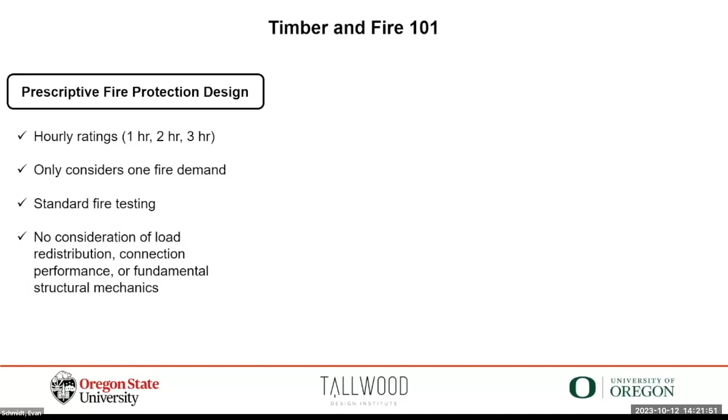That is what you all are specifying within the International Building Code. Those critical behaviors are flame through, smoke through, or structural failure, although structural failure very often does not control. So if you notice, there's no structural engineering or design associated with the hourly ratings.

On the flip side, performance-based design for fire uses everything we know about structural engineering and fire dynamics to develop a building-specific fire demand. If I wanted to calculate what the fire demand in this space is, I could, and I could perform a performance-based design and look at how the fire would spread within this space, what would happen to the windows, how egress could be enabled for everyone to get out.

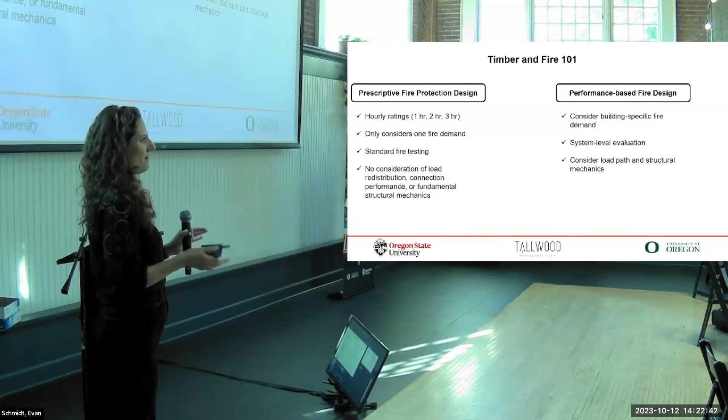We could also look at system level evaluation, considering if one of these girders failed, could load be redistributed throughout the roofing system, or would that spark progressive collapse of the building. This is really where the research lies.

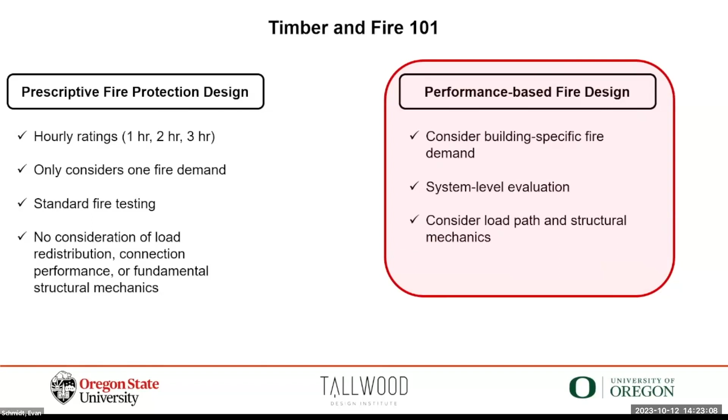All of the research we're doing at Oregon State University as it pertains to fire research falls under this performance-based design. How can we more fundamentally understand the behavior of mass timber in fire? How do we understand its pyrolysis and charring better, and fire dynamics within the mass timber environment and a mass timber building?

So now that you all understand fire and you're all fire experts, I'm going to tell you the story of fire research within TDI. It's been really focused on 4 segments, the first being timber concrete composite floors.

We heard from Ian about all the amazing research happening on timber concrete composite floors, on all the different types of loading scenarios, as well as serviceability requirements. We tested a number of timber concrete composite floors in fire multiple times over the last 5 years, as well as performed finite element analysis and developed design solutions for them.

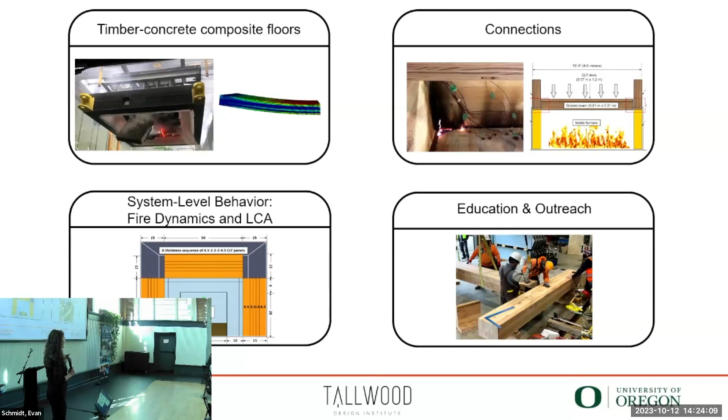We've tested a number of connections, both platform frame and balloon frame connections, as well as glulam beam to column connections, and I'll talk about those a little bit later in the presentation, both under a heating exposure for the fire, as well as in a cooling scenario after the fire, so during all phases of the fire demand.

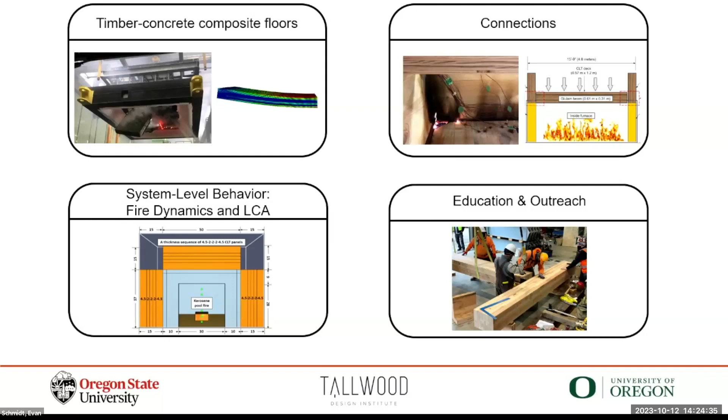We have used Fire Dynamics Simulator to simulate fire within mass timber buildings, to simulate fires within mass timber compartments that have been tested all over the world. We've been able to simulate velocity measurements as well as heat fluxes and temperatures throughout these compartments and buildings, and then took all of that knowledge and applied it to mass timber buildings under construction to look at sequencing of applying fire protection and how we can incorporate that into the design process.

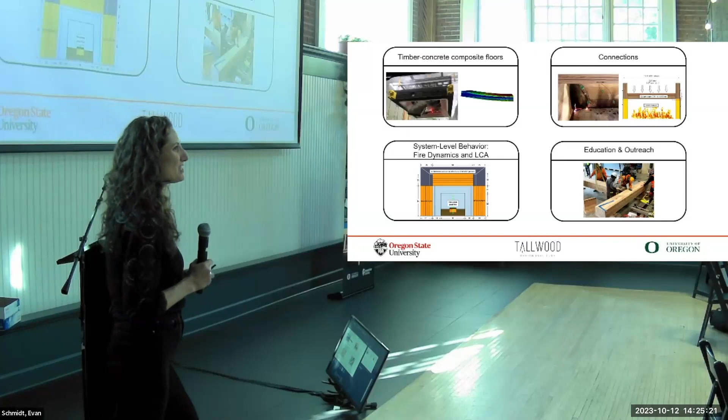So this is really where we've been going in our research. I have education and outreach, and I'll talk about it at the end. I know a lot of my colleagues have highlighted the students working on this project, but all of this research is funding students. It's funding the next generation of mass timber experts who are going out and working for all of you, bringing that knowledge and excitement for mass timber into industry. We can't forget about them, because all of these research projects are developing new knowledge, but also new students and new experts in this field.

So there are questions left to answer, a lot of questions. We've been looking mainly at the heating phase of fires. We haven't been considering smoldering of mass timber. How do we design a mass timber building for firefighter safety? How do we design for smoldering so that we can prevent further damage of mass timber during that decay phase of the fire?

What about LCA, which we talked about a lot? In fire, the emissions from a building contribute to the carbon and environmental impacts. Water runoff from firefighter suppression systems also contributes to the environmental impacts of fires. What are those emissions in a mass timber building? How do they differ from a building that's steel or concrete? How do they differ when you have protection versus no protection within the building? Protection meaning encapsulation, not sprinklers.

And then, can we actually scale these experiments? Large-scale experimental testing is really expensive. I literally fly to another country to go do them. So can we actually learn from scaled experiments in fire? What can we learn, and how is that beneficial to moving this industry forward? And how can we do that maybe on OSU's campus with our new fire lab?

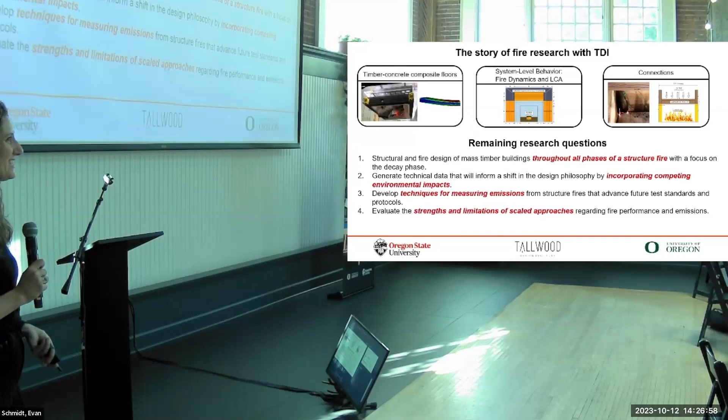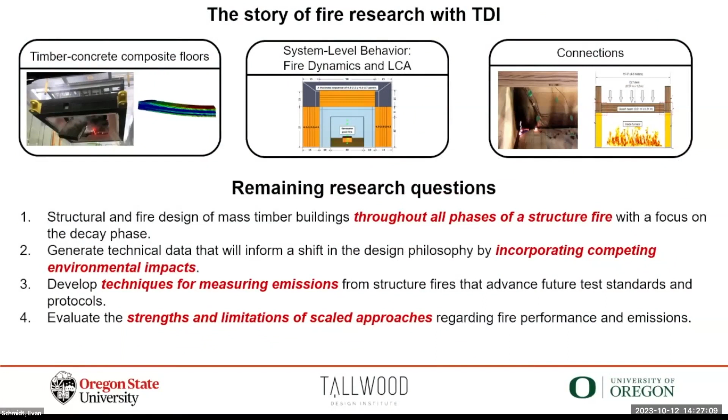So these are some of the remaining research questions. I'm sure you all have many, many more, but this is really where I'm going to focus the remainder of my presentation, to show how some of this previous research is fueling future research that we're doing to answer these questions.

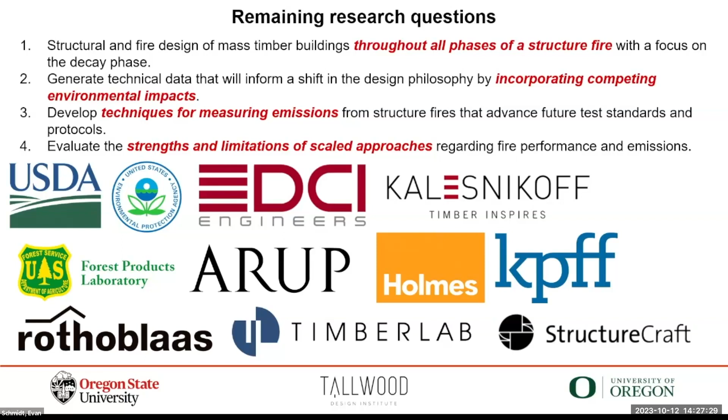So all this future research is in collaboration with a lot of you. I want to highlight all of these amazing companies that have been consulting on our projects, as well as providing support for the projects, and hopefully hiring our awesome students.

Okay, so now that you understand the prescriptive fire protection approach, the performance-based fire protection approach, and what we've done so far in fire, I'm going to talk a little bit about the decay phase of the fire and why this is so critical. You heard this morning from Ian and Judith about how we're really supporting our local economy through all of this timber research. We're taking timber from Oregon forests, funneling them through Oregon companies, creating these mass timber products, and putting them in our Oregon institutions.

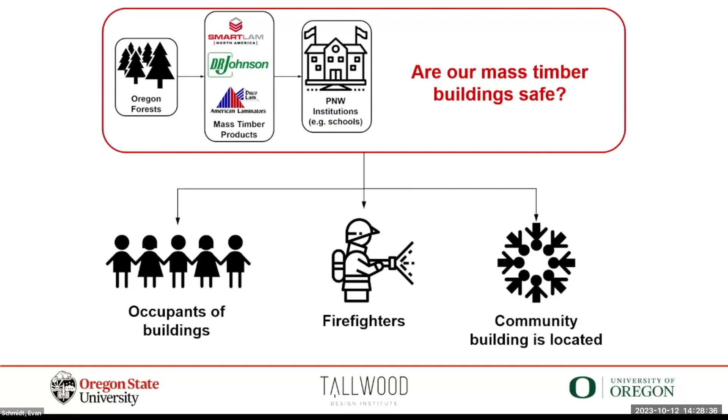But are our timber buildings safe? A lot of our research is really focused around that. We're focused on whether our timber buildings are safe in seismic and fire. Are they durable? But from the fire side, I'm asking this question from the occupant safety as well as community safety with emissions from the fire, as well as smoldering for firefighter safety.

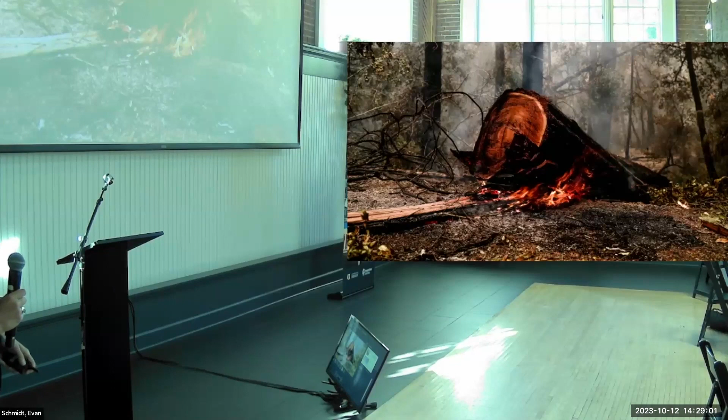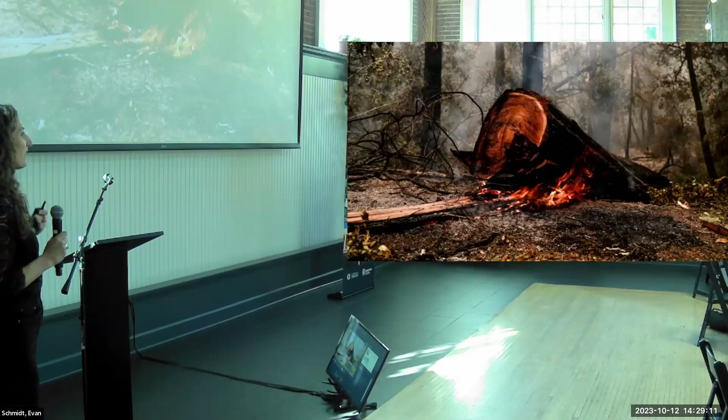So we know smoldering occurs, right? We are in the Pacific Northwest. I can probably guarantee 99% of us have been camping, and we know that timber smolders, we know that the campfire smolders. Mass timber is no different, and it's not a bad thing. It happens, and we can't ignore it. We need to make sure that we address it. We need to know where the smoldering occurs so that we can actually design for it, and so firefighters can identify it in buildings when they go in, and we can create a safe environment for everyone.

There's two experimental regimes that have been going on that I'll dive into in a second, that have really been inspiring this future research that's going to be happening over the coming years.

The first topic is smoldering behavior of platform frame and balloon frame construction, as well as fire behavior of glulam beam to column connections. In recent years, in all my fire experiments, we've been including a decay phase of the fire, to just leave specimens on the furnace and continue to collect data so we can see what happens.

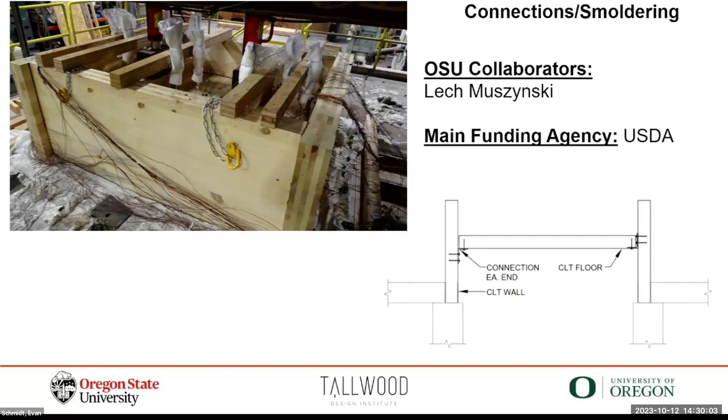The first project I'll talk about is in collaboration with Lech Muszynski, funded through a USDA Wood Innovations grant. This project tested balloon frame and platform frame connections, shown on the left, in a smaller scale setup on a furnace at the Western Fire Labs.

The specimens were loaded and exposed to 1 hour of the ASTM E119, which is the standard fire. We then shut the furnace off and just left it for an hour.

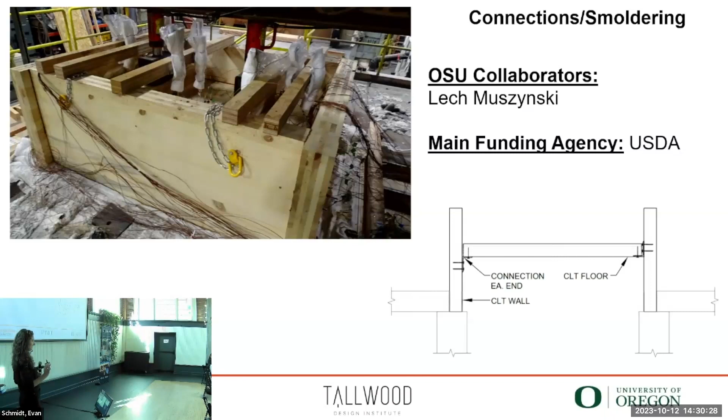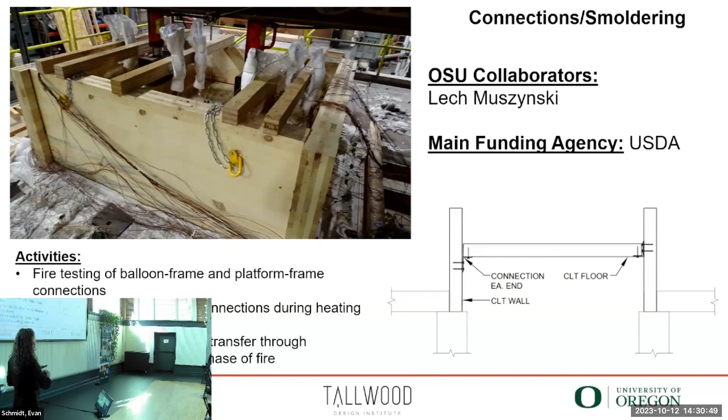Our goals were to look at what the char rates were during the heating phase and what the char rates were during the cooling phase. Do we actually see char progression during that hour of quote unquote cooling? And then how do these connections actually perform during the fire itself?

What we saw is that heat does begin to propagate through these connections. Equilibrium has to occur, right? So if it's cooler on the top surface of the CLT, heat will continue to propagate through the CLT, through the connection, so that we have that equilibrium of our temperatures.

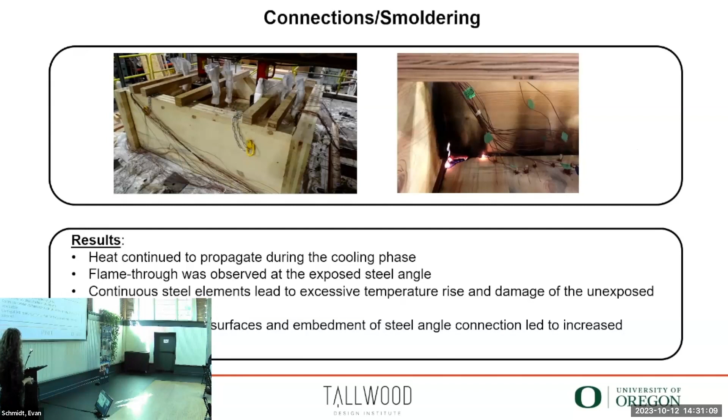We saw combustion, that picture in the top right is flames that occurred 9 minutes into the cooling. So the furnace had been shut off for 9 minutes. There was no external combustion and flames occurred.

We saw that there was very large temperature rise when we used steel elements within the connections. And then we also saw some really interesting behavior with the charring.

We saw char compression. In steel construction, we characterize our connection performance in terms of rotational capacity during a fire. But in mass timber, if we try to apply the same thing, we have rotation of the connections during the fire due to loading, due to just thermal degradation of the wood itself, due to the decrease of material properties. But then we also have compression of that char itself. So we have both happening at the same time. So how do we differentiate between the two?

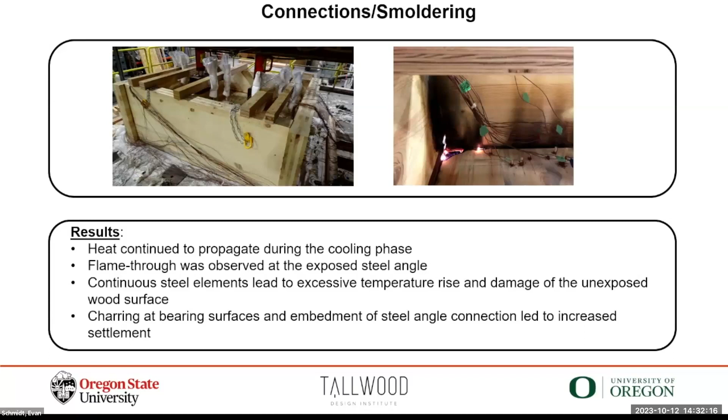What movement is from char compression? What movement is from just the structure itself?

We had the opportunity to perform another experiment on fire behavior of glulam beam to column connections. These connections were tested under deformation compatibility at OSU, and then we tested 3 connections under fire demands at the National Research Council in Ottawa, Canada. So I literally go to another country for these fire tests. This was in collaboration with Arijit Sinha and KPFF and Holmes.

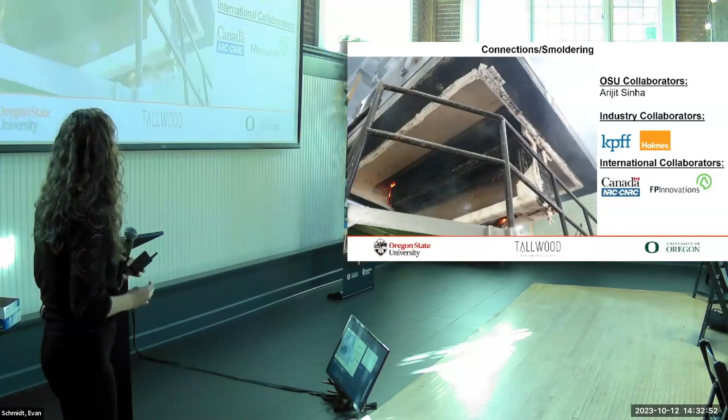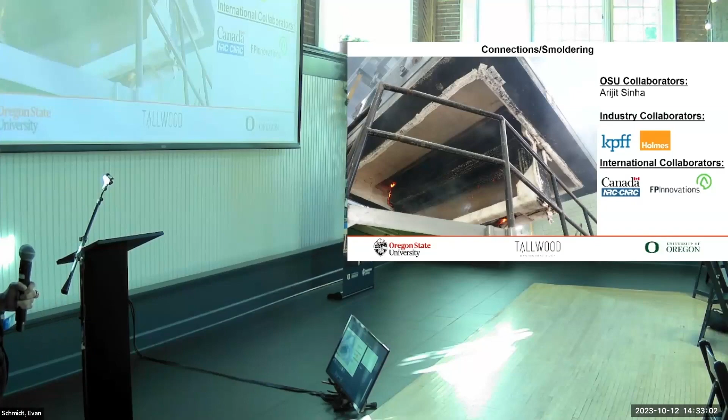We tested, again, 3 different types of connections. The picture I'm showing here is after we subjected each connection to 1 hour of heating, and then we just shut the furnace off and left it there for 2 hours. And that is what came out of the furnace.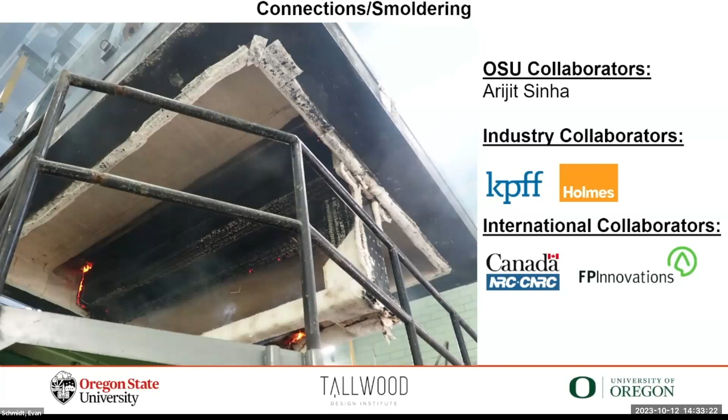After 2 hours, it was still flaming. And again, this isn't, I'm not saying this is a bad thing. Mass timber is great, but we need to understand this better so we can actually design for this. We can actually understand why this is happening and how to protect against it.

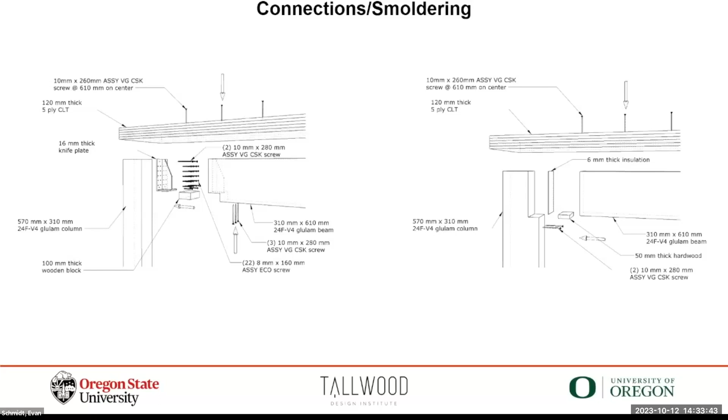The 3 connections that we tested: shown here on the left was a knife plate connection where the glulam beam was bearing on a steel knife plate that was then embedded within the glulam beam itself and screwed to the column. The one on the right is a pure bearing connection, so there was no mechanical fasteners between the beam and the column.

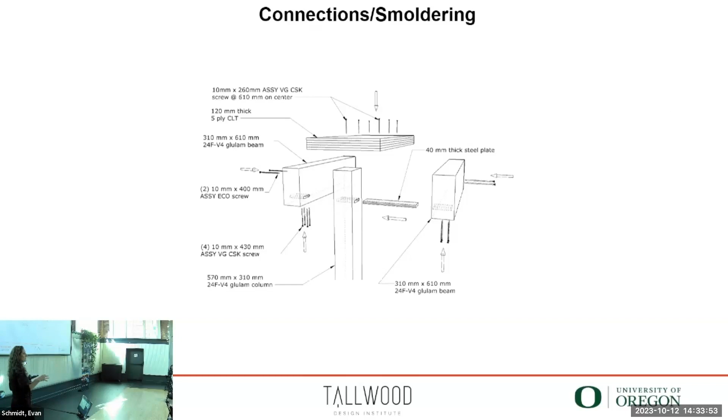The last one was a double beam connection where 2 beams sandwiched a single glulam column, and there was a steel plate connecting all 3 together.

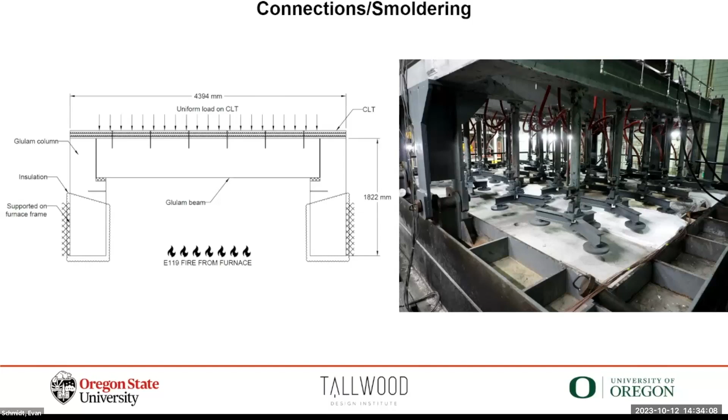We loaded the top of these specimens with a distributed load. This is why I go to another country—their loading apparatus is fantastic. And then we subjected the specimens to the standard fire.

We were able to look at the char depth through the connections as well as through the glulam and the CLT itself. We saw that there is definitely more charring through the connections, and we were able to calculate that the char rates in Eurocode for connections are actually unconservative. We saw corner rounding, almost textbook corner rounding, which is when the char creates those rounded edges, and what was predicted in Eurocode was almost spot on to what we saw in the experiments.

We saw that smoldering occurred for almost every single specimen. Every specimen was flaming when we took it out of the furnace, and the heat continued to propagate through the connections as well as through the glulam itself during the cooling phase.

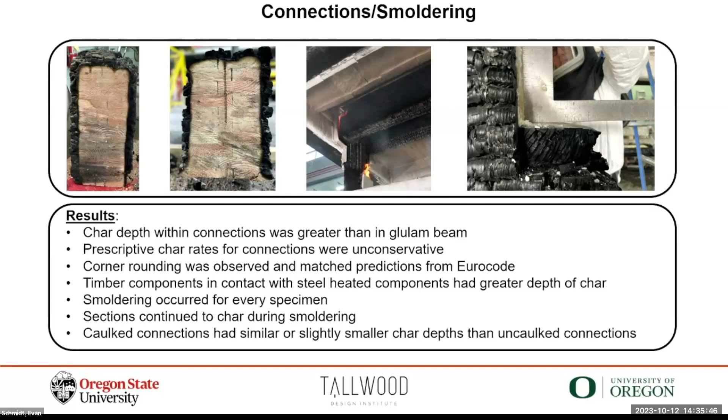We actually tested two connections per specimen, so we were able to test a caulked and an uncaulked connection. We didn't really see a lot of increased or improved behavior with caulking—we saw either similar or slightly smaller char depths with caulked connections. But on the picture on the right, you can see compression of the char. Nothing was at 90 degrees when we took it out of the furnace. We were able to see that compression of the char due to just the weight of the glulam on that block right there.

So we did these two projects. We tested isolated connections or connections within frames, but these aren't real fires. The ASTM E119 fire is not a real fire—it's actually a very intense fire. And a furnace is not a real environment either, so it doesn't have the right amount of oxygen that we would have within this room, or if there was a fire within this room.

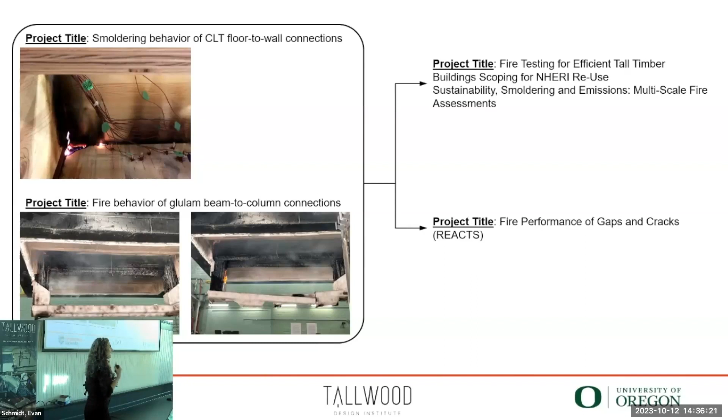So where we're going with this is that these tests were really informative to show what could happen, what is possible, what needs to be studied. And we can further study this in a project that is just kicking off in fire testing, doing large-scale compartment fire testing next summer at the Alcohol, Tobacco, and Firearms Lab in Maryland.

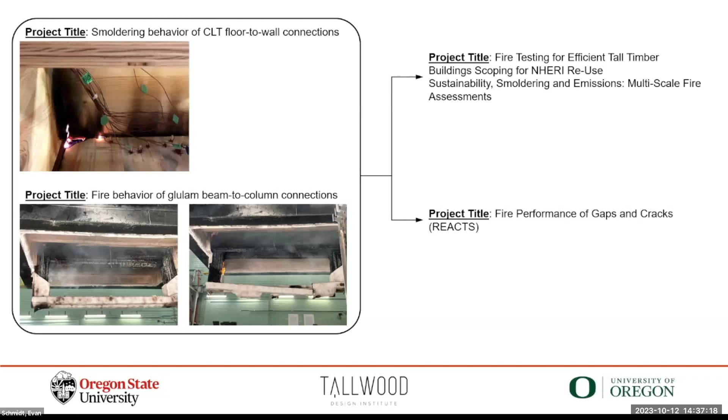So I'll just cover those briefly before you don't have to hear from me anymore.

This project, looking at large-scale compartment fire tests, our goal is really to look at a number of different things. We want to address smoldering, sustainability, and emissions. This is in collaboration with Forest Products Laboratory, ATF, and the EPA.

We are testing at three different scales. We're testing at large scale first next summer. We'll then be testing at the Forest Products Laboratory at medium scale compartments—someone asked us what a medium scale compartment was, and we decided the size of a doghouse, so that is a medium scale compartment. And then we will be doing some bench scale tests.

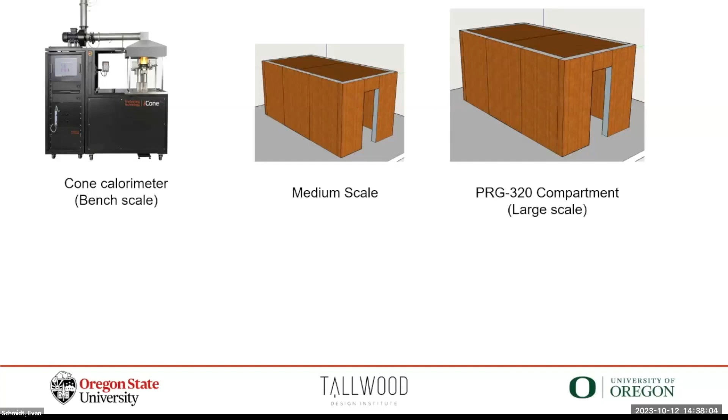We want to know what is scalable—what can we learn from scalable tests? Do we always have to do large scale tests, or can we actually perform some of these medium scale compartment fire tests that are much cheaper? Can we learn something from our bench scale tests and scale it up to an actual building environment, or do we always have to do these large scale tests?

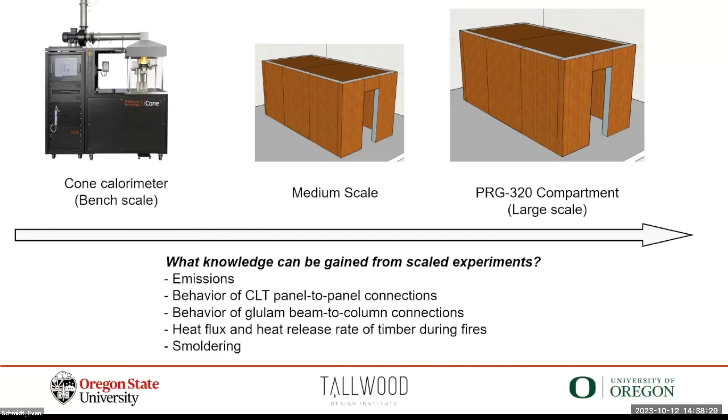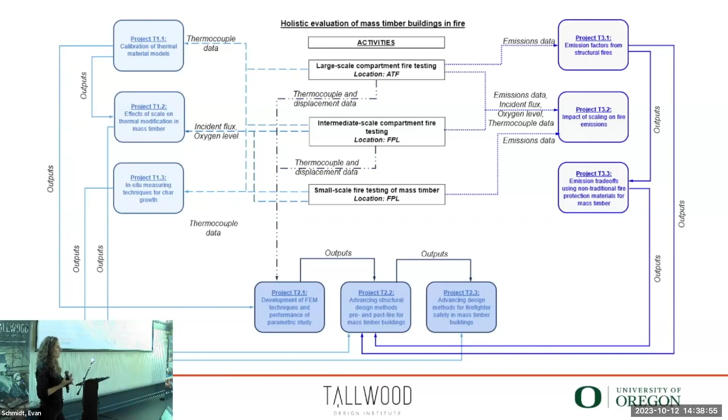Every part of the project is really connected to one another. All the information from one scale is going into another scale, and all the information between tasks is going into one another. We will be doing finite element analysis of all the different scales, including FDS modeling as well as modeling of the connections themselves. So this is really experimental, numerical, overarching scalability.

These tests will occur also at the Forest Products Laboratory. Between the previous proposal I told you about and this REACTS proposal, this has created a really great collaboration between OSU and the Forest Products Laboratory. Again, there's students on these projects. We need amazing students to go into these labs and learn from the technicians and researchers, go work there, and continue that collaboration. So here I'm just showing CLT, but we're looking at gaps in glulam connections as well as in CLT panel-to-panel connections, trying to answer these questions I posed earlier.

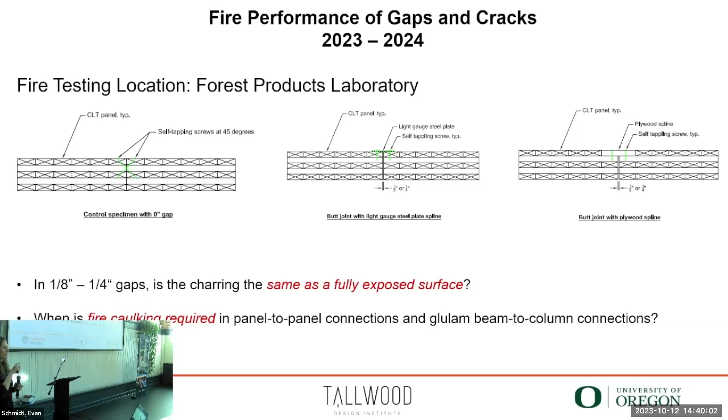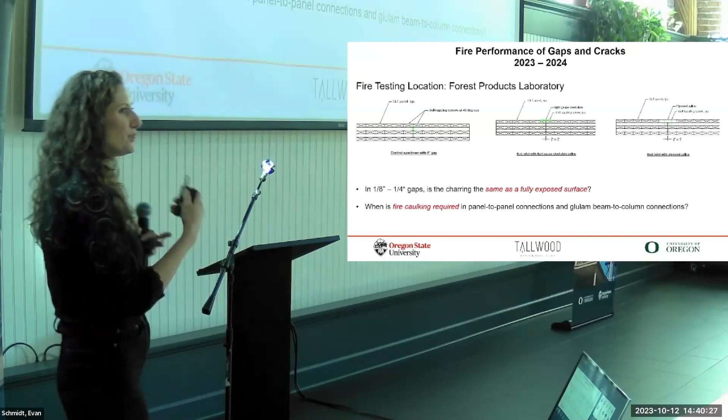What is the fire behavior within those gaps? Is it the same as a fully exposed surface, or is it something different? Do we need fire caulking in an 1/8 of an inch gap, or can we get away with something else? So really trying to answer those questions. Question I have is, how do you numerically model that? Do you just say it's normal air or not? Doing these tests and repeatable tests will give us enough data to start answering these questions.

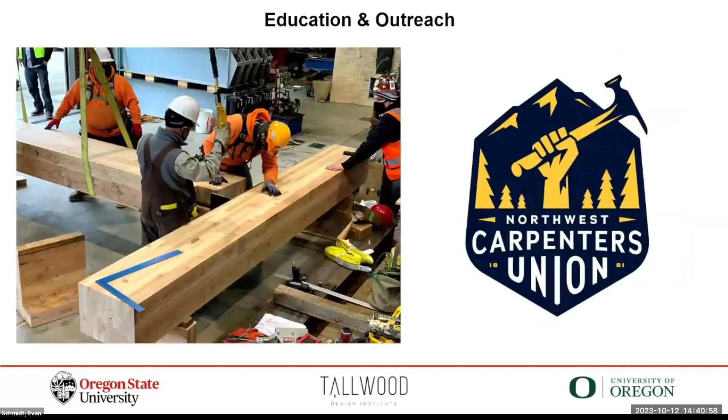The last part I'll talk about with education and outreach is collaboration with the Northwest Carpenters Union. They built all of our deformation compatibility tests that we performed at OSU a number of years ago. We need more structural engineers and architects to go work for all your firms, but we also need people to build the buildings. And we need our structural engineers and architects to understand how to communicate with them and for them to understand how to communicate with us.

So this provided that space. Working with them, they built all the specimens, so we can say our specimens were built by actual carpenters. It's great. Our student, Haley Medlin, was communicating with the workers and carpenters themselves, and they were communicating back to her. So part of her master's degree was learning how to actually operate on a construction site and communicate with carpenters. And part of their framing class was building her specimens and learning how to communicate with structural engineers. It was a really great educational experience, and we hope we can keep collaborating with them in the future.

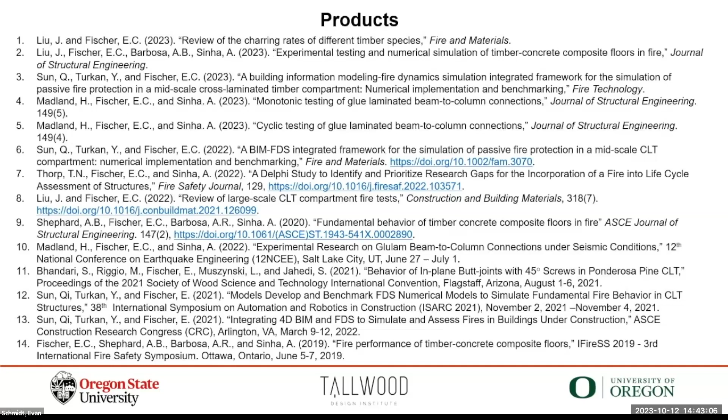These are all the products that were developed through the projects I talked about, funded through TDI. These are conference and journal publications developed with students. And then I keep talking about this fire lab - we're very excited about this. I'm really excited not to have to travel to another country to do fire testing. Into the future, hopefully in a few years, I can highlight some tests we're doing actually on OSU's campus, and you all can come down to OSU's campus to see what a fire test is all about.